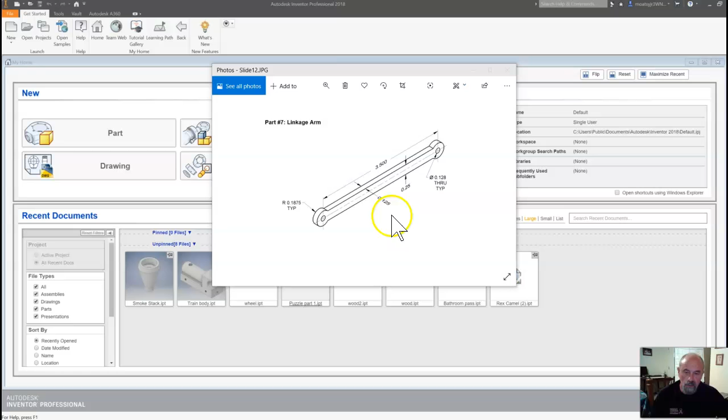Okay, the height on this web, the bar connecting the two, is 0.25 inches. The thickness is half of that, which is 1/8 of an inch, or 0.125. Okay. So I'm going to start this out. I'm going to move this off screen here, close out my home, and create a new standard IPT.

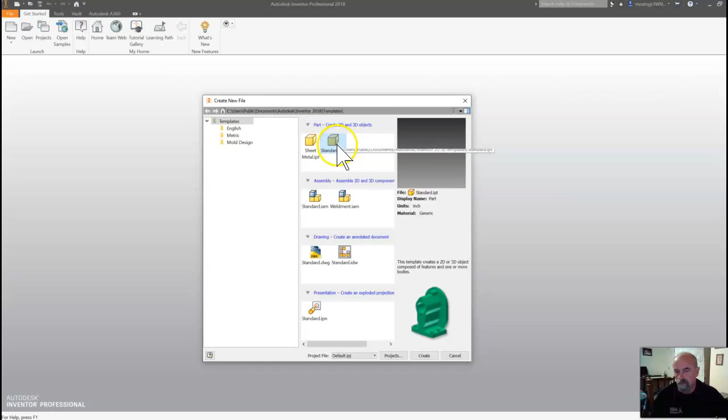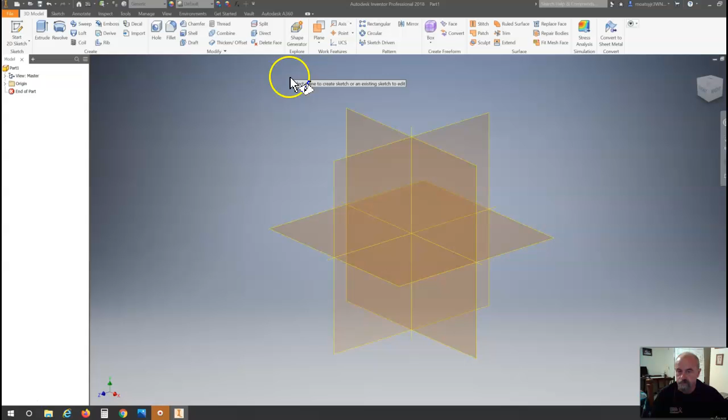And then just wait. Okay. All right. Once this is in place, I can drag this over and maximize it. I'm going to start with a 2D sketch as usual. And I'm going to click on the XY plane or the front view.

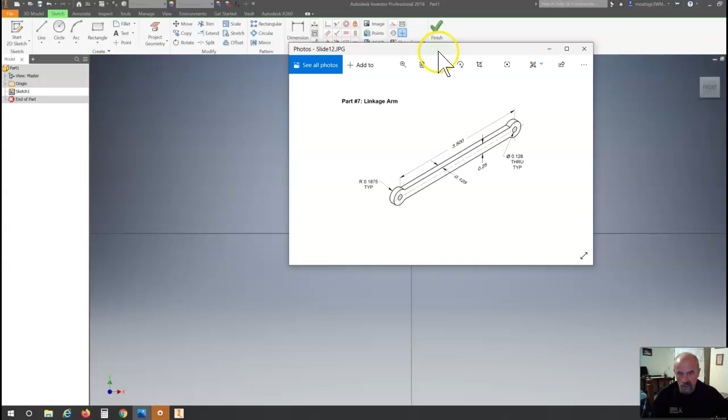Now, I'm going to start by drawing these two circles. And I'm going to put them on the horizontal center line. So, I'm going to put one circle here, 0.128 inches in diameter. And then I'm going to come over here, make that 0.128 inches in diameter, keeping them on the same horizontal line.

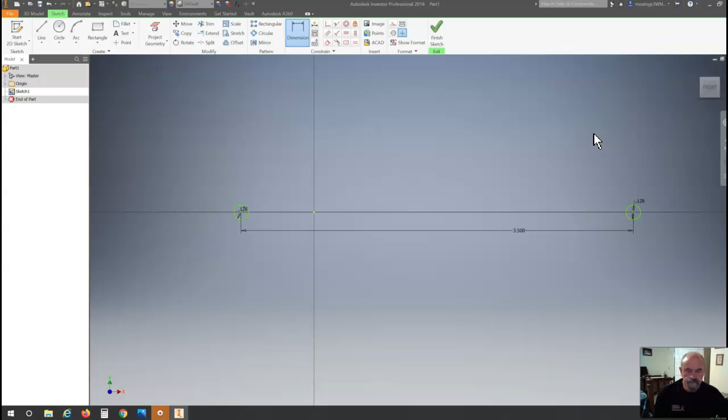And then I'm going to dimension these two circles center to center, and I'm going to set those to be 3.5 inches apart. Get them centered there. All right, so the next thing I'm going to do,

I'm going to come up, click on the center point circle again, and using the same center point, I'm going to put another circle on both of them that are 0.1875, which is the radius, times 2, so I can make it the diameter. That gives me a circle of 3/8, or 0.375. I'm going to do the same thing on the other one, 0.375. Okay, so I have these two that are on the same line.

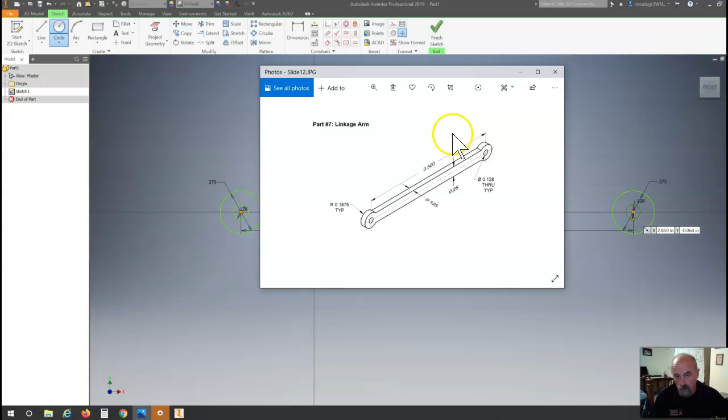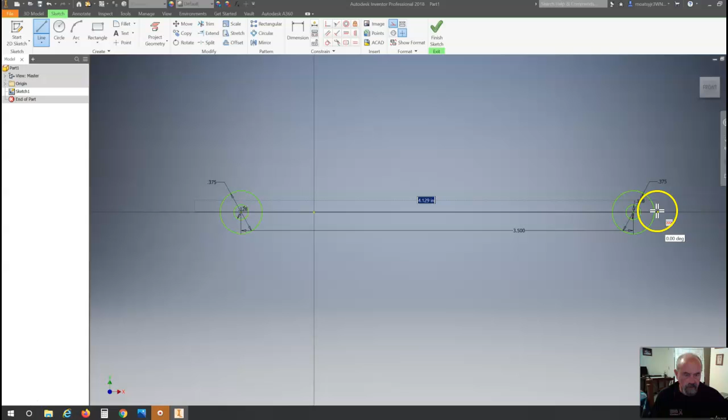Now what I want to do is create a construction line, just as you see this center line running all the way up through the center of this web from circle or hole to hole. I'm going to put a construction line by clicking on line, then coming way over here to format, this weird looking laying down Y says construction, and I'm going to click on that. I'm just going to click on that horizontal line over here outside of the circle, and I'm going to go right through the center line of both circles, right on past the circles.

Now, as you can see, I've got a yellow dotted line. Let me zoom in on that, hopefully so you can see better. Right there it is. So it's a dotted yellow line. That line is not part of the geometry of the part. So you cannot use a construction line for an object line. It won't work. It's there to define geometry.

Okay, so the next thing we're going to do with this is come back up and turn the construction line off. Come back to the line feature. And then again, starting over here outside of the circle, I'm going to draw a line through both circles and make sure that it's parallel with the center line. I can tell because it's got that parallel constraint right there. Let me click off, escape.

Now I'm going to dimension from the center line to that line and set that dimension to be 1/2 of a quarter, which is 0.125 or 1/8 of an inch. Then I'm going to come back up, click on line again, and then start over here outside the circle, go right through the circle, making sure that that's parallel also. Hit the escape key to get out of that function.

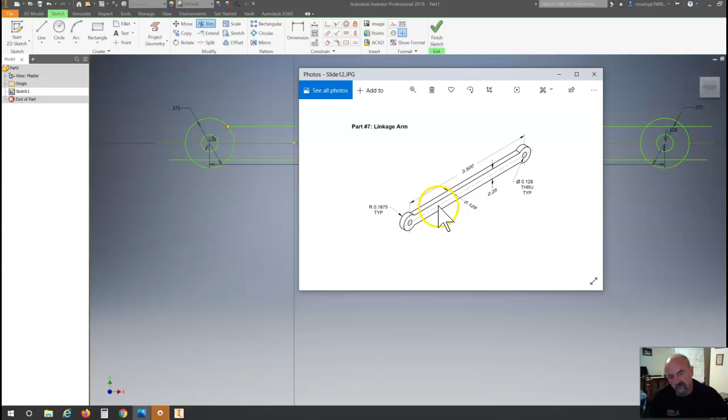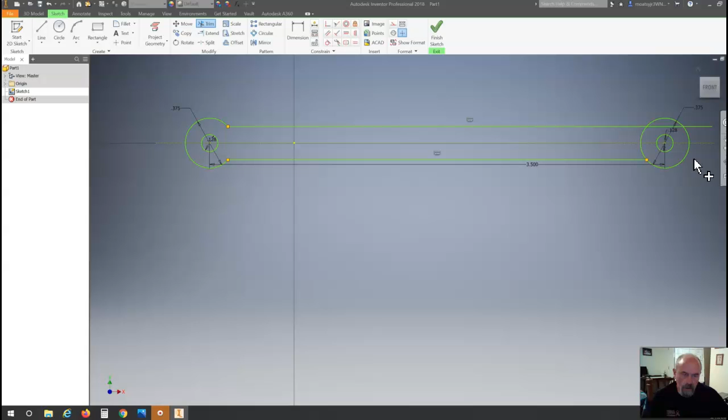And then I'm going to start to cut all these extra parts out, because what I want it to look like is the face of this linkage arm. So I'm going to cut all those extra lines out so that I have just one complete profile on the outside and the inside. Now, what I don't need to do is cut out that construction line. That will not interfere in the project. So what we've got here is our complete linkage arm.

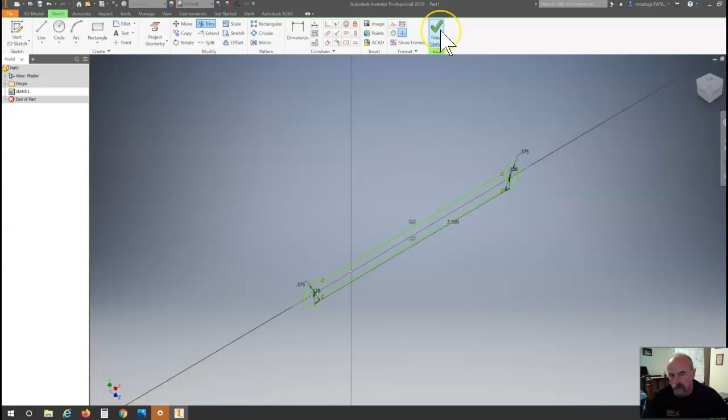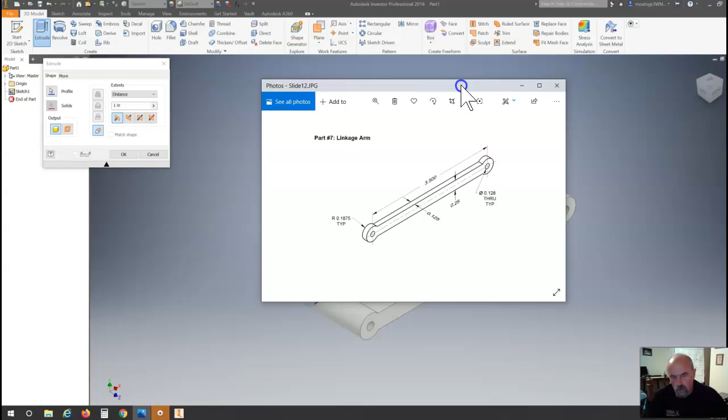So I'm going to come up and click Finish Sketch. Come to the left side of our tool ribbon and click on Extrude. And I want to extrude this 0.125 or 1/8 of an inch. 0.125. All right.

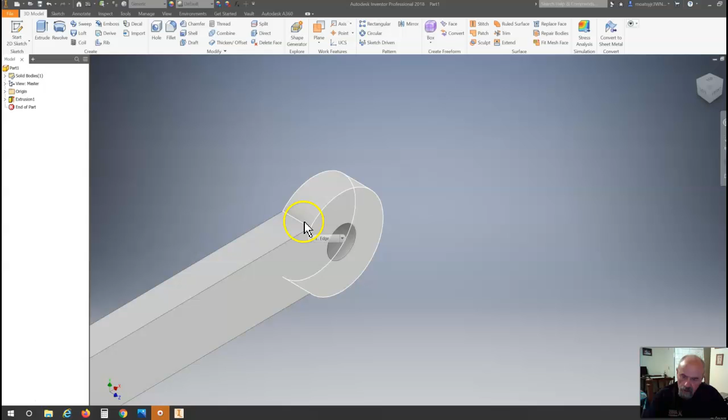Now, the only thing I'd like to point out is if we were actually making this, with this line right here, this edge, I would put a fillet in there because that's where that's going to break. That sharp edge between those two surfaces will be the fracture point. I'm going to go over that tomorrow with finite element analysis with this part, but I'm just going to demonstrate it, explain it, and show it to you guys. I'm not going to have you do it because it gets complicated across 3 separate softwares.

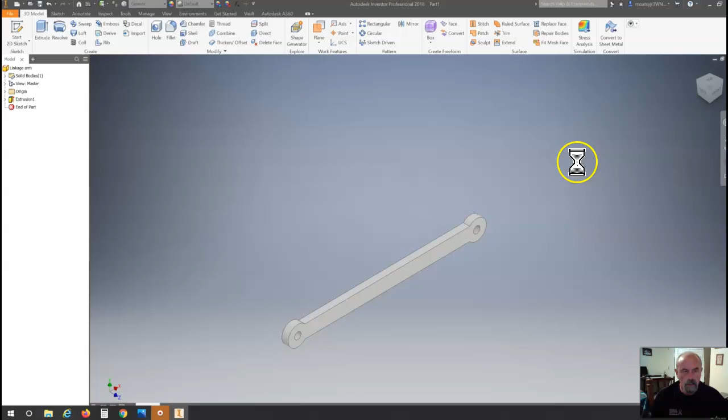Okay, so this is our complete part, and all you need to do is File, Save As, Linkage Arm, and you are complete for today. That ends everything I wanted to go over with you guys today.

You have today and tomorrow to create this part, and that and your smokestack, I was going to say stovepipe, your smokestack are your 2 assignments along with watching tomorrow's video for your participation grade for the week. That's all I've got for you.